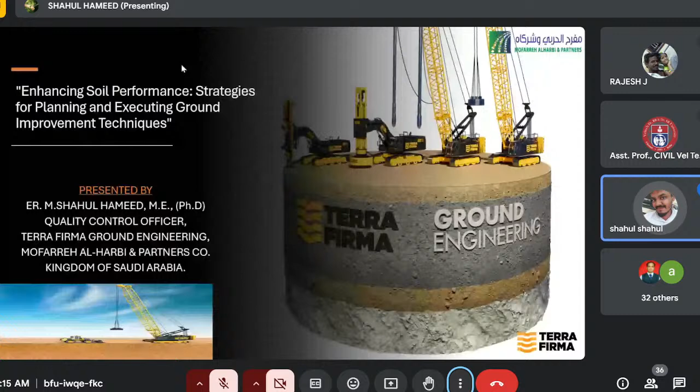Okay, so let me start my presentation. Before going to the planning and execution aspects, I will tell the basics of what we are doing, then I can go to exactly how to plan and execute the geotechnical work for ground improvement. First, what we are doing: we are doing ground improvement for the soil. So we should know what ground improvement is, and then what techniques we are using. Accordingly, it will be easy for you to understand what exactly we are doing.

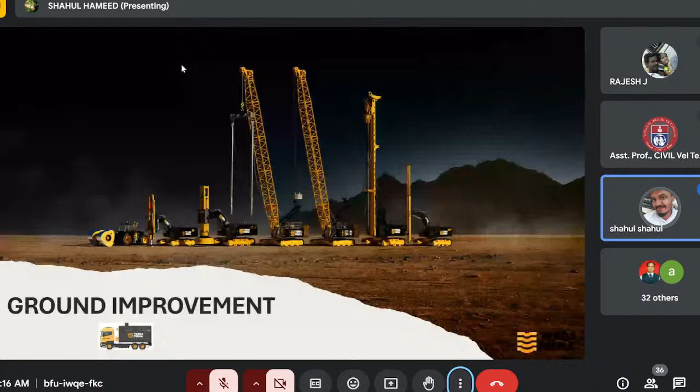So ground improvement is needed for three things. The main thing is bearing capacity of the soil. We need to increase the bearing capacity of the soil, reduce the settlement of the soil, and increase the stability. If we are going to construct any buildings, we need to increase the bearing capacity. So with ground improvement techniques, we try to increase the bearing capacity of the soil, reduce the settlement and increase the stability of the ground. That is the main concept of ground improvement. We have many techniques; I will share them one by one.

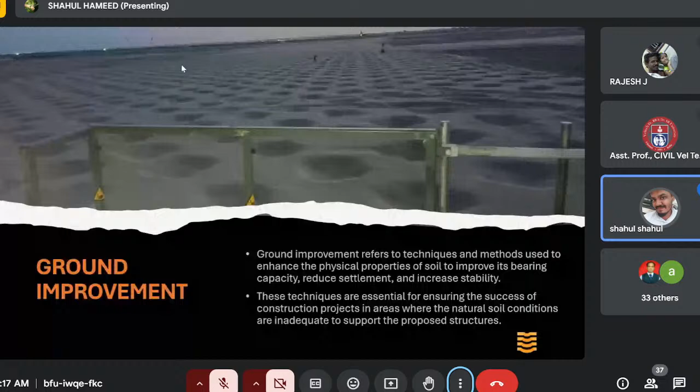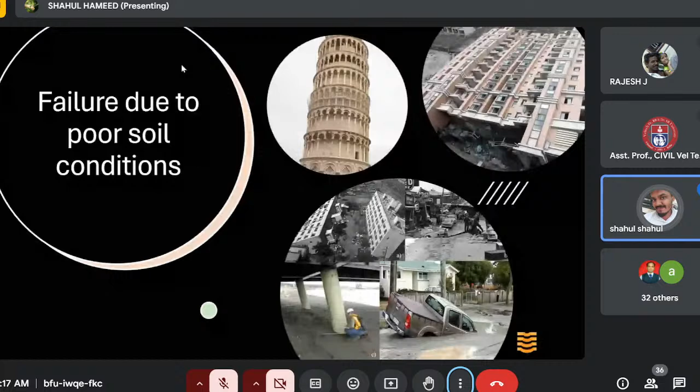So in this picture you can see failure due to poor soil condition. Many buildings failed due to not considering the soil criteria. So before constructing any structure, we should check the soil condition: what is the bearing capacity, what is the settlement. Based on that only we need to construct the building. These are the problems of soil: liquefaction, differential settlement, and excessive settlement. We need to concentrate on these before constructing a building or any other structure. So let me share what we are doing.

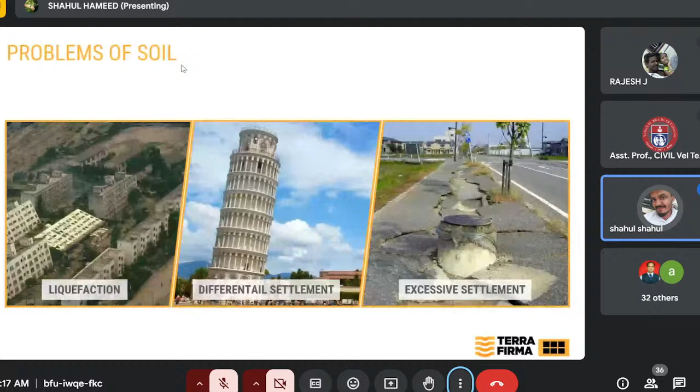Yes. So before doing any compaction work, we need to test the soil. For example, if you're going to the hospital, or if you're affected by some flu, what do you do? The doctor will check your blood sample. He'll collect your blood sample and he'll find out which kind of flu you are affected by. Based on that, they will give the treatment for you, right?

The same way, we'll go to the ground. We do some pre-testing. Based on the pre-testing, we'll do analysis of which kind of treatment we can provide for the soil based on the soil condition. Then we will provide the treatment. We'll adapt the treatment.

After the treatment, we test again. That test is called the post test. Based on the pre and post tests, we will ensure that the soil was strengthened. That testing is called CPT. CPT means cone penetration test.

This is the machine I'm showing. Crawler type is available and tire type is also available. Basically, the crawler type is easy to move in desert areas. We are in the Middle East, so the majority of the area is desert and near to the ocean as well. The soil was very silty and also very light, so the crawler type is best to move from one place to another to test the ground.

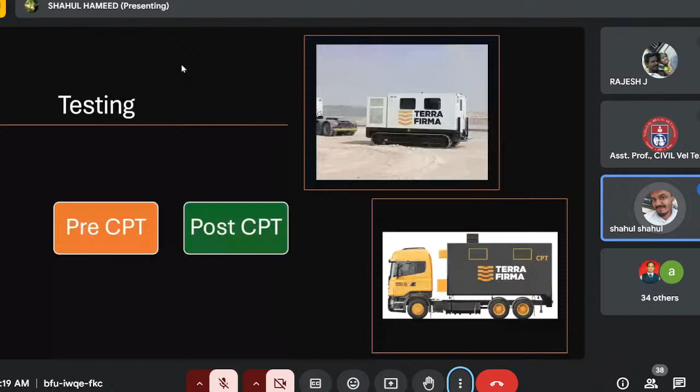You can see it in the next slide. This is the cone. The cone is actually a sensor; the cone contains the sensor. This cone is used to determine the subsurface condition of the soil. You see the machine here. Wait a minute, I'll take the pointer. Yes, you can see the machine.

In the machine, we have an opening at one end. From the opening, the rod will go down slowly. We have hydraulic pressure inside the machine, and the hydraulic pressure pushes the rod down. The rod will go down into the ground and collect the data of the soil. What data will it collect? It will collect the cone resistance, sleeve friction resistance, pore water pressure, and the friction ratio. This data we will collect from the soil.

Based on the data, the design team in our company makes the design based on the soil condition, whether it is weak or strong. Based on that, we decide which technique or treatment is good for the soil. The hydraulic push is at the rate of 20 millimeters per second. This is the rod. It enters into the ground and collects information about the soil. This is called the cone penetration test.

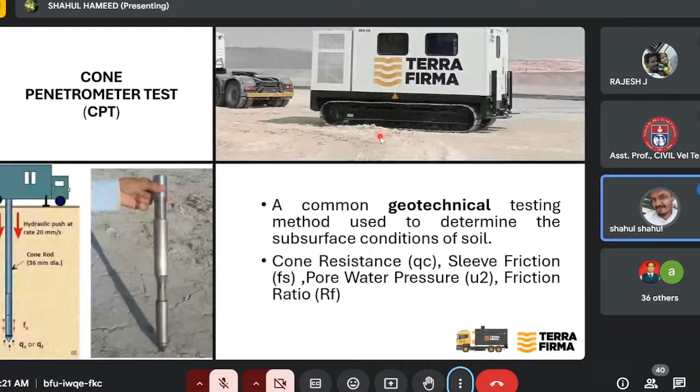So the client will provide the design criteria, up to which depth we need to go. They will mention in the design criteria like 6 meters we need to go, or 10 meters, or up to where the denser soil is. So we need to penetrate the cone up to the denser soil. So that is a condition.

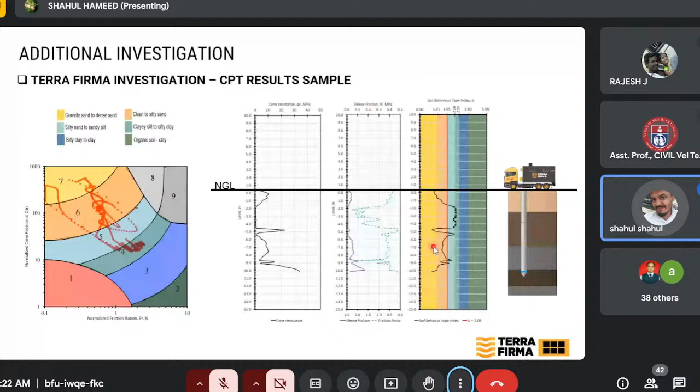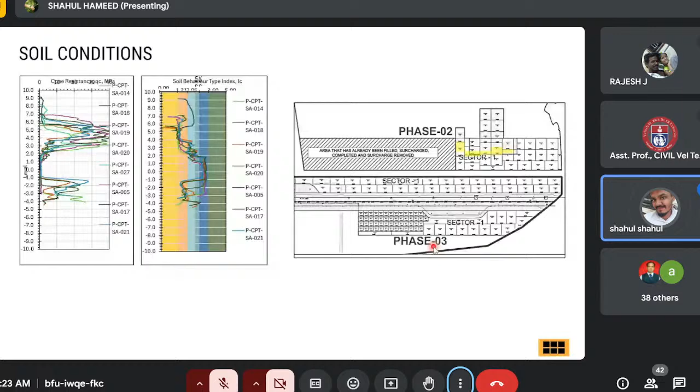And based on the CPT data, we checked what kind of soil, what kind of resistance, and what is the strength of the soil we are finding from these CPT results. Suppose the soil is very weak, then we need to adopt some treatment, which we call a technique. A technique like we have DC. DC means dynamic compaction.

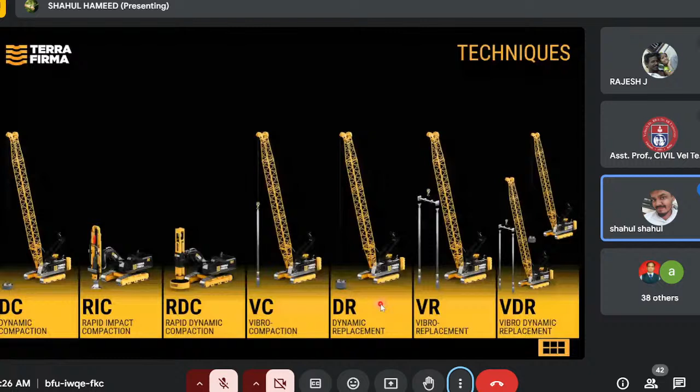Next, we have two categories: fine grained soil and coarse grained soil. Silt and clay are called fine grained soil, and sand and gravel are categorized as coarse grained. For coarse grained: sand, silty sand, gravel, and the dune sands come under the coarse grain category.

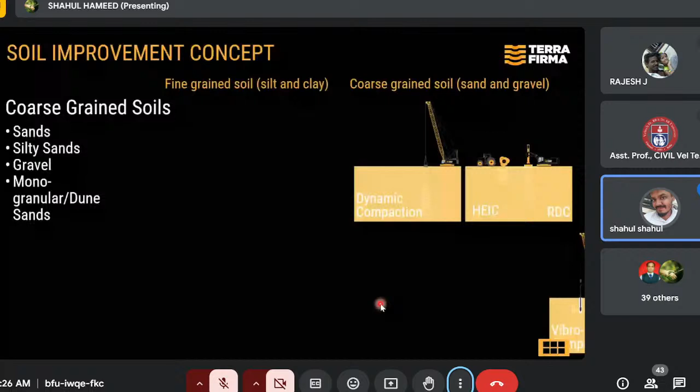For this, we adopt techniques like dynamic compaction, RDC, or vibro compaction for the coarse grain soil. And if it is a fine grain soil, we adopt techniques like dynamic replacement, vibro replacement, rigid inclusion, and prefabricated vertical drains.

We adopt these techniques for fine grain soil because it is full of silt, so we need advanced techniques like dynamic replacement or vibro replacement. So based on the soil criteria, we adopt these techniques. First, we'll test the soil to see which soil is present, and accordingly we'll choose our technique. Okay.

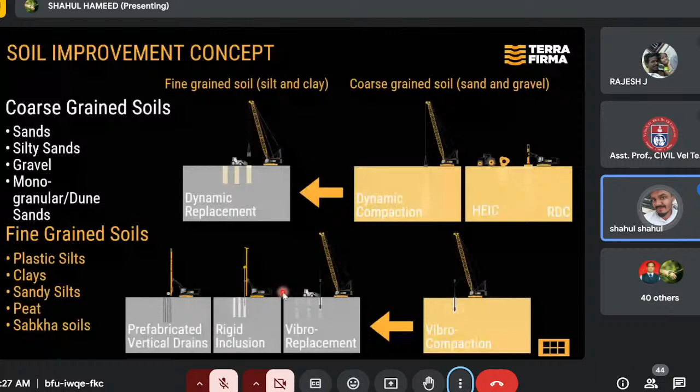Next is how we are selecting the technique. We have a simple method using legends L1, L2, L3. L1 is sand, IC means soil behavior index, so we calculate the soil behavior index. It is less than 2.05, or if it is greater than 2.05, and L3 is hard strata. From that we are classifying the technique.

For example, hard strata we can get from 1 to 4 meters. If you reach the hard strata from 1 to 4 meters, L3 coming up to 4 meters means we have sand, L1 is only sand. If it is like that, we will adapt only rapid dynamic compaction, the treatment up to 4 meter.

Suppose your depth is more than 8 meter, 4 to 8 meter, and your hard strata is found up to 8 meters, we are adapting the dynamic replacement. And for dynamic compaction, your depth of hard strata is more than 12 to 14 meter.

So we are adapting dynamic compaction, but we need to ensure there is no silt content present, which means L2. If the silt content is present, we should go for dynamic replacement. So we need to ensure there is no silt content but the depth of hard strata is more, we can go for dynamic compaction. But if depth is less and silt content is present, we should go with only the dynamic replacement.

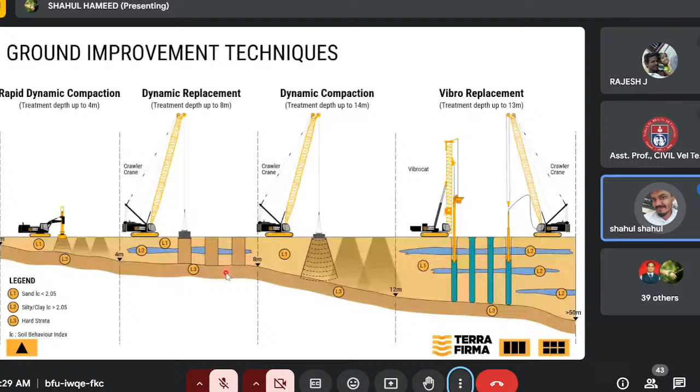And for the execution, before starting any work we will choose some trial area. In all companies, they never just accept to start like that, so before that we need to do some trial work. Once the trial is accepted by the client, they will allow us to do it.

So based on that we have the drawing, from the drawing we choose some area, and from that area we'll do some trial activity. From the trial activity we can find out how many blows are required because the dead weight is going to come down. So we need to find out how many times to tamp, from which height I can put the dead load.

So that calculation is based on the trial area, because every soil is different from one place to another. So if you're going to start any work at a new site, we'll do some trial work. Based on that, we'll calculate how many blows we need to give, how much energy we need to put, and from how much height we need to provide the dead load.

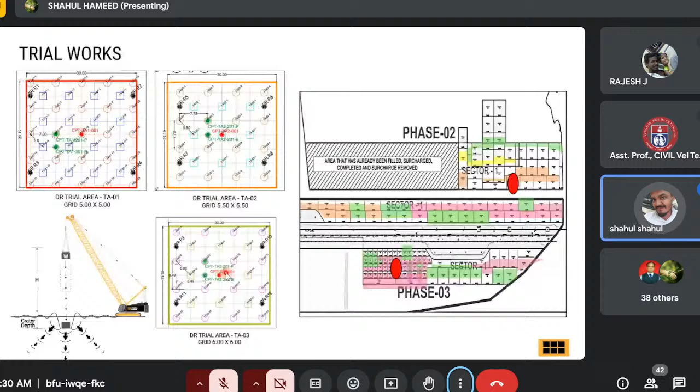For example, I can show the graph, like one side is penetration. So penetration you can calculate from the machine - the machine has a sensor and provides the data. So we have the machine from the client, we have the data, so we can find out the penetration depth from the machine. We'll give one blow, two blow, three blow, up to when the penetration is zero. When the penetration is zero, we'll find out this many blows are required for this ground.

We'll do some three trials, we never take only one trial. We'll do some three types of trial with different grids, so we can find out exactly how much blow is required for this ground, and how much height also we can tell them. This is one of the techniques.

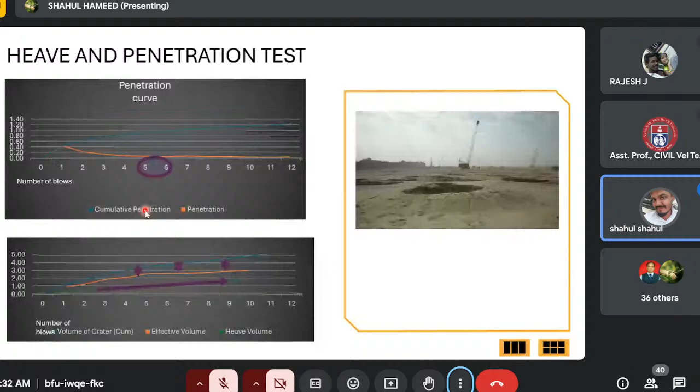And the next slide is like the grid. Just a minute.

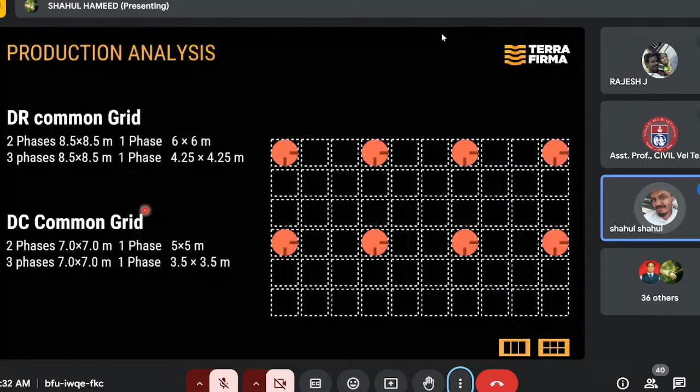The grid actually for the DR area, the grid size is different, and for the DC area, the grid size is different. The grid is nothing but the distance between one blow to another blow, that is one print to another print. So what is the distance between one print to another print?

Generally for DR phase two, we consider 8.5 meter into 8.5, or phase one, 6 into 6 meter. For the DC, for phase two, 7 cross 7 and 5 cross 5. So it is based on the trial test, we can select from the trial test. These things the technical team and the design team have, and the design team will suggest us the distance between one print to another print accordingly.

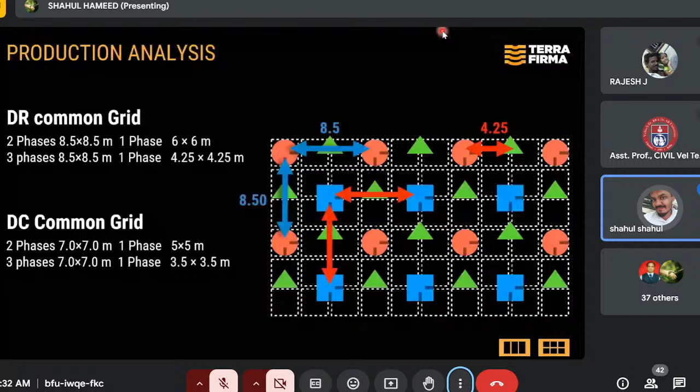And we can go for the dynamic compaction. So first, what is dynamic compaction? Which is nothing but we have the dead load. So if the ground is loose, the dead load falls down and makes it compact, improves the soil, and we can fill the soil. That's it, we can fill the soil.

You can see the animation running. So the ground initially was weak, so we will start tamping on it to reduce any air gap or any particular gap that is there. We can remove that gap with the help of the dead load. After compaction, we'll do refilling. This is called dynamic compaction.

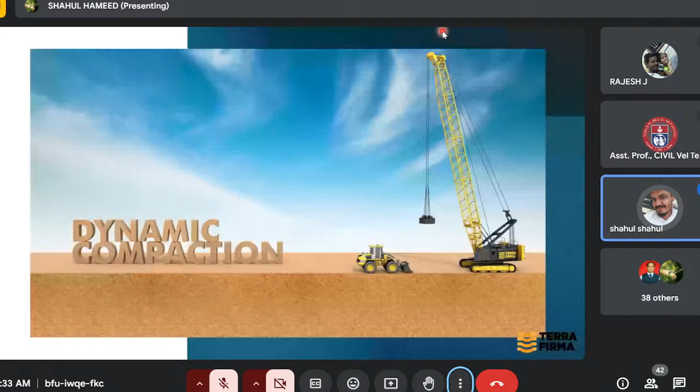You can see the circle-like structure. This circle is called a print. So we'll select the ground and choose the print, and how many prints are required for this ground - we have the calculation. Accordingly, we made the print and we can start the blowing on it and make the ground strengthen.

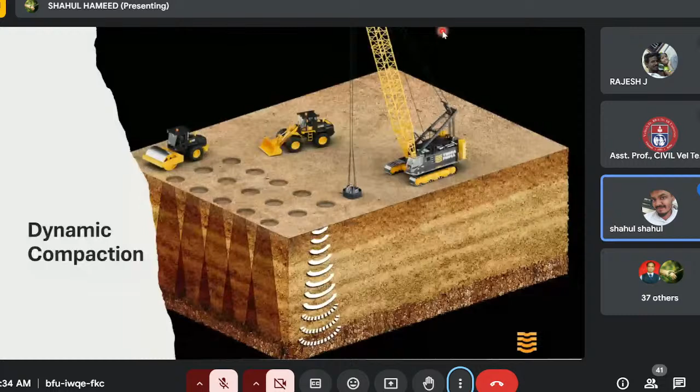Generally, dynamic compaction is a technique used for the loose soil. It's an effective and economical densification method to improve the ground. It's an economical method and generally used for the loose soil.

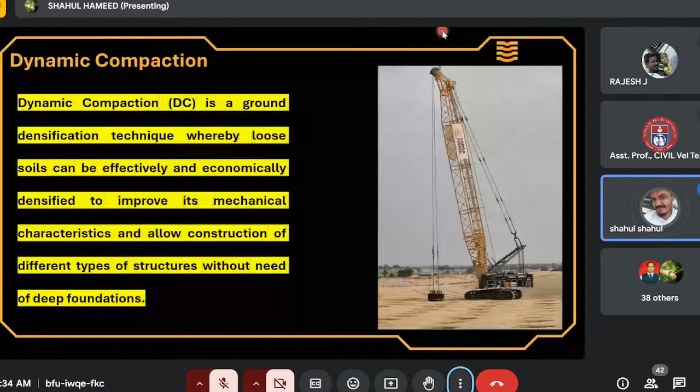You can see some of the pictures - we have done some compaction, so it will create some holes. So from these holes, we are filling the sand after that. The soil initially was loose; after the compaction it makes a hole.

Just a minute, you want to take something? Yeah.

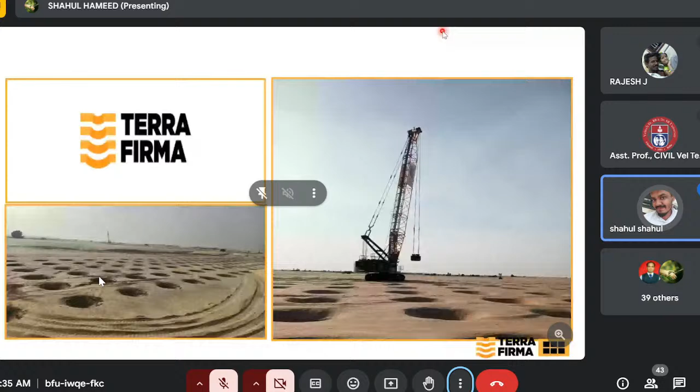So these are some of the images which I have done on ground improvement techniques. It will create a hole, so from this hole, that much gap is there - the soil was densified. Then it's again filled by the soil, and I'll make it level. This other picture is taken from the side, while doing the compaction process.

Yes, the depth of the height and the diameter of the weight, everything is calculated based on the trial test.

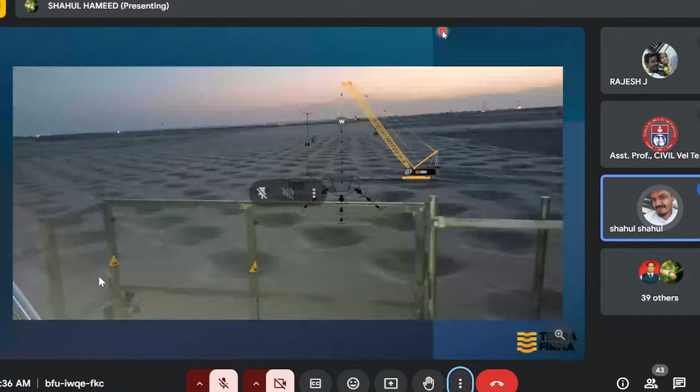The next technique is called dynamic replacement. Dynamic replacement is nothing but the ground will be compacted, then the hole will be formed, then the hole again is filled by the sand - filled by good condition sand.

You can see the picture. So the weak ground is compacted, it makes a hole. I will show it again, wait a minute.

Now we can see that the ground is weak. The dead load is coming down, so it will make a hole. Then we will fill the good sand - we'll give the good sand. Again it was compacted and made level. This was done for the entire ground.

This dynamic replacement is suited for where the soil contains silt particles. That kind of land, we are adapting the dynamic replacement to strengthen the soil.

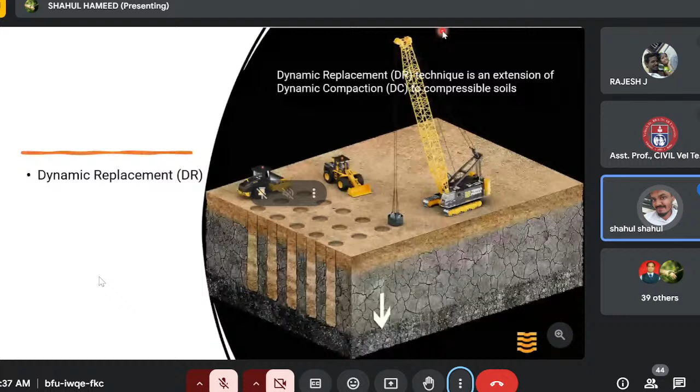So dynamic replacement is an extension of dynamic compaction. DC is normal - we are simply compacting, we are not filling anything. But in DR, we are replacing the sand, filling good sand, and compacting - it's an advanced technique. That's the only difference between DC and DR.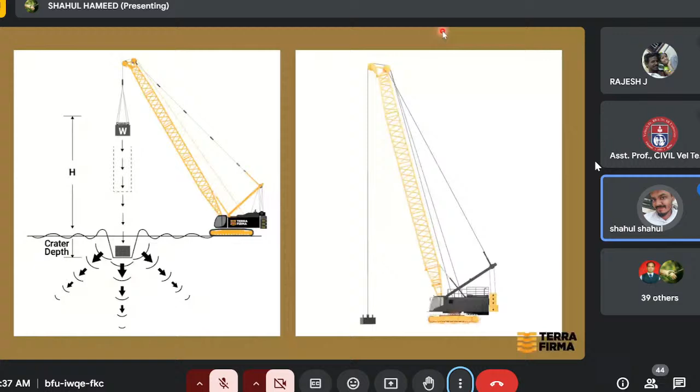Okay, now it's audible. Yes, now it's audible. This picture is like, yes.

Now this picture is like a pounder. So this is a pounder. You can see the weight, maybe changing from 10 ton to 33 tons. We have different types of pounders, so based on the ground condition, we adapt the pounder weight. So the pounder range is from 10 ton to 33 tons. This is the weight of the pounder.

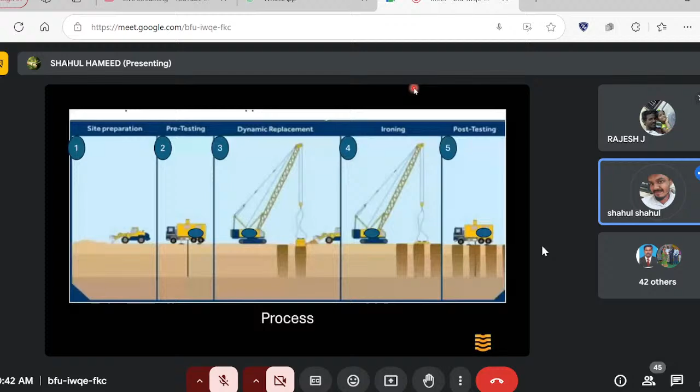Next, we'll go on the planning aspect of the ground improvement work. Initially, suppose you are working as a planning engineer in a geotechnical project, how to plan our work - that I'm going to share. I was working in Keller last year in Abu Dhabi, UAE, so from that we worked on some projects. I'm going to discuss that project, how I made the baseline program, and what planning aspects we need to do. This is the second part of the presentation - baseline program for project planning.

Before starting any work anywhere, we need to submit the baseline program. The baseline program is the Bible of the work. From the baseline program only, we can follow up how many days it's required - from day one to the last day, what work we are scheduling, who is coming for the work, how much manpower we are going to use, what equipment we are going to use. From the baseline program, the client may easily understand and accept it.

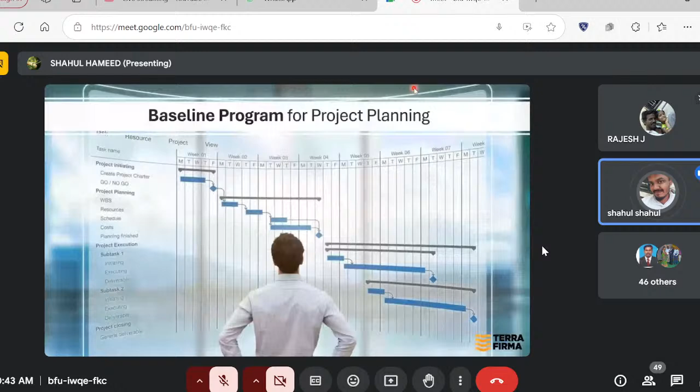So the first file is the baseline program. Before starting your work, the baseline program file must be approved by your client or consultant. For preparing the baseline program, what documents are required? The very first document required is the project contract document - this is important, because you should know the contract detail between you and your client, what is the scope of your work, what things we are going to do. Everything is based on the contract document, so first we need to read the contract document. In the contract document, legally the scope, deliverables, BOQ, and technical specification are mentioned - we should read the contract document first, and BOQ is a must.

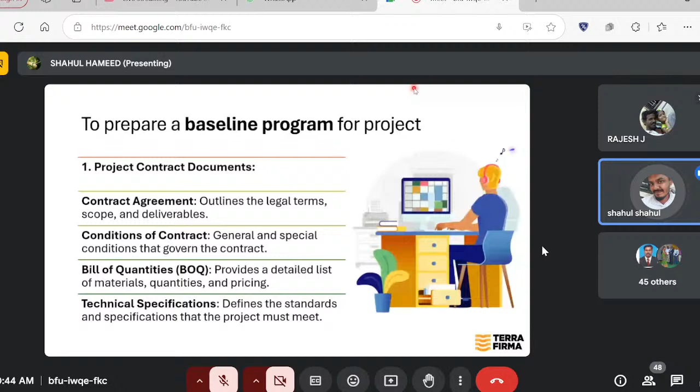We should read the BOQ - bill of quantity. For example, if we are going to do any excavation, I'll show in the next slide how much quantity, what's the quantity per meter, and what is the amount for this particular work. This is explained in the BOQ. From the BOQ, you can understand the quantity as well as the cost, and accordingly plan your work. So reading your BOQ is a must for planning work.

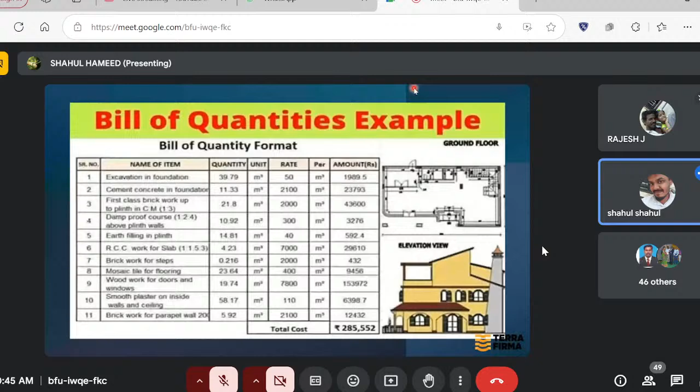We should read the contract document first, read your bill of quantity, and read the drawings and design documents, because we have different types of drawings available in the field - architectural drawing, structural drawing, MEP drawing, some shop drawings, and approved design drawings. Generally, based on our work, whichever drawing is needed, we need to read that drawing first. From the drawing, you can identify how much area we are going to work on, and find out any obstruction or the distance between one area to another.

So you can come to a conclusion based on the drawing. Reading a drawing is important for the planning of your geotechnical work. Not only geotechnical, all work. You can consider it a basic thing for all work. So first you need to read the technical, I mean contractual document. The next one is the BOQ we need to read, and the third thing is reading your drawings and design documents.

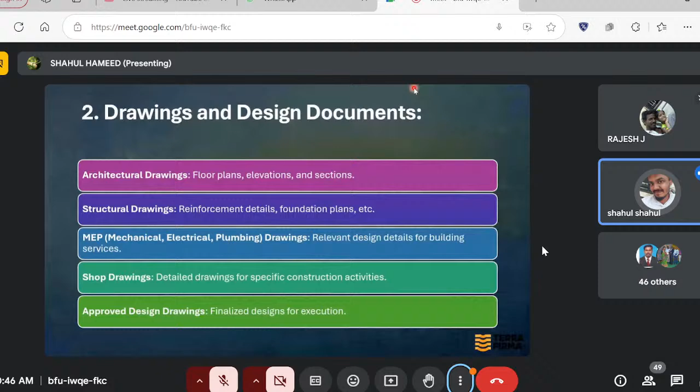Okay. So next one, project scope document. What is your project scope exactly? What scope you have? What is the contract between you and your client? We need to review the project scope, and also we need to do the WBS, work breakdown structure. Based on that we need to plan our activity, like how to create a WBS. That is important. What's the first work, what is the second work, and any other sub branches. We need to split the work, because if you split the work, you can organize your planning work. So making your work breakdown structure is a kind of skill that we need to develop.

And we need to know about the milestones and deliverables. A milestone is nothing but when the client is asking to complete one area to another area. What are the important dates to hand over? Those things come under the milestone. And we need to find out the critical activity and critical path. If we have any work, we should find out the critical activity, because we cannot change anything in the critical activity. We know that a critical activity is one where your float value is zero. Float zero means we don't have any days to delay. If you delay your critical activity, your project duration will be extended.

So if the activity falls on the critical path, we should focus on this activity first. Then for the remaining ones we have some float value, 1, 2 or 3 days. We need to adjust the work and do it. But we should focus on your critical activities first, because we cannot lose any single day on your critical activity. We need to complete on time.

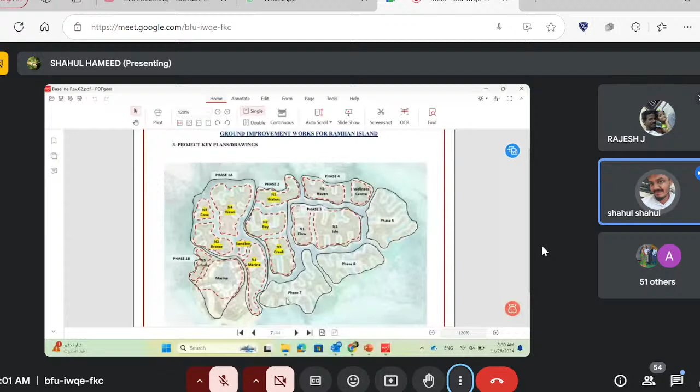So we need to highlight that area, and we need to tell them the available area of each island. There are little small islands, and the collection of islands is called Ramhan Island. Each island holds an area, and based on the area only, we can find out when we can finish the work. So we need to mention the area with the help of your survey team. They will go and mark your points, find out the area of each one, and give it to you.

And we need to mention the crew movement. Crew movement is nothing but where I'm going to start and where I'm going to end. We need to make a diagram and tell them I'm going to start this area first, then follow with this, and after completing I'm going to this island, that island. We need to represent it with a drawing so the client understands easily. If you make it like this, the client will easily understand your work plan. Okay.

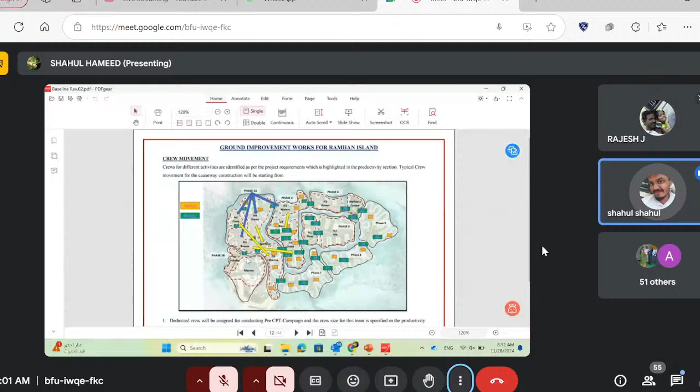Next, other documents, like how we are making the bar chart, and what document registers we are going to maintain. That purely depends on the planning part. You will understand when you're working on the planning side. The next important thing is the work breakdown structure.

So we need to make our work breakdown structure. We have a lot of work, so the work will be distributed. What is first, second and third? It's followed by which work? It's continued by which work? That is called the work breakdown structure. So we need to make the work breakdown structure first.

The next one is we need to give the IDs for each activity. For example, for your procurement activity, we should give some ID, and for shop drawing, we should give some ID. For the material and method statement, we should follow some ID. So we should go like this. We should make some activity IDs first. Okay.

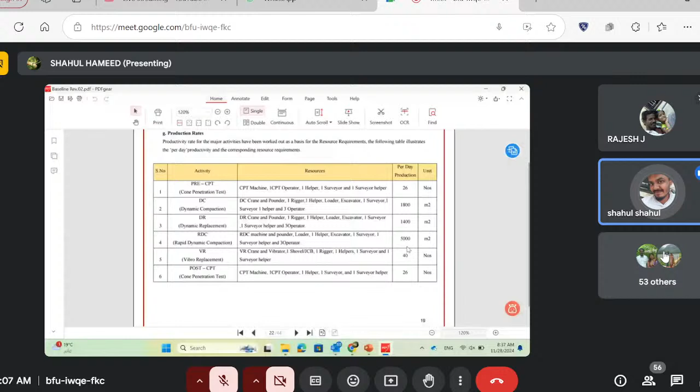So this information is required for the ground improvement work and also geotechnical work. Per machine efficiency, how much area it will complete, that we should know. Only based on that can we conclude the duration of the project. And some notes: the working criteria and conditions we need to tell them.

The next one is the critical path. So we need to find out the critical path. We need to make a program in P6, Primavera. So we should find out what the critical activities are, and we need to submit to the client. And this is a detailed planning program created in Primavera.

And the next one is the manpower histogram. With the manpower histogram, we need to create an S curve. The S curve is important for the planning. So we should show them, from the first week, how much equipment I'm going to use, next week how much equipment, and it will go on up to the end of the project. How many machines are coming this week, how many machines I'm going to use.

You should plan your work to submit to your client, because we should have the plan of when we are going to start the work and how much equipment is required for this week, and we need to tell your team. So I need this equipment for this day, I need to start this work. That aspect we need to follow up. It's easy to follow up on them.

And this is for the equipment histogram. Previously, it was the manpower histogram. This is the equipment histogram, purely for the machines: RDC crane, CPT machine, JCB, whatever equipment is coming. So we need to make the weekly planned equipment histogram before starting the project. So we should follow this document.

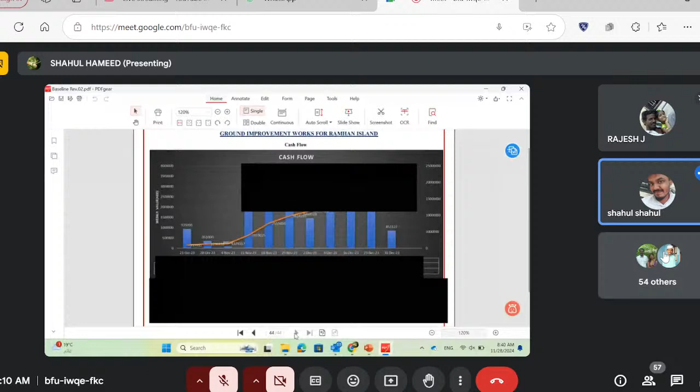So S curve for your equipment, S curve for your manpower, S curve for your activity. Three kinds of S curve, and the last one is the cost S curve also. You need to make your cost S curve. Okay, per week how much cost we need to collect. I have shared this drawing because I don't want to share my cash flow here. So this is the way.

This is the kind of document we need to submit to our client before starting the project. This is called the baseline program. The baseline program is the entire detail about your work. The baseline document should be approved, then after that you can start your work. I'm telling about the execution part now. Once your document is approved, we can do pre-CPT and post-CPT, and start our work.

So every day we need to submit the daily report. The daily report is nothing but, for one zone, how much area we completed the last day, which activity is done, either pre-CPT or post-CPT. I can show my daily report here. Now I'm working on the Fahdili gas plant in Saudi Arabia, on the Fahdili gas plant expansion work. So ground improvement work we are doing.

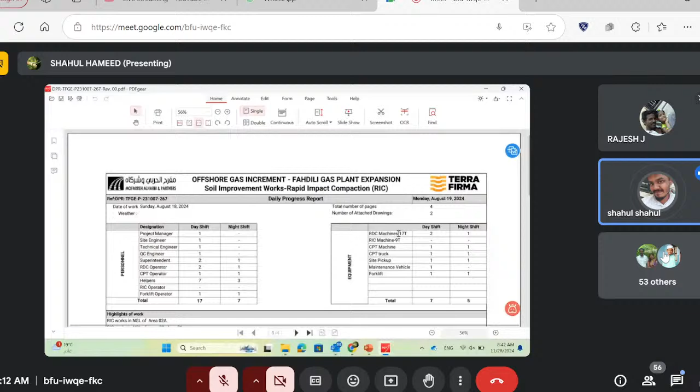So we need to tell them which engineers and which manpower are working, and what equipment I'm going to use. I need to highlight the last day's work. Last day I was using RIC work, CPT work, and forecasting what I'm going to use in the future. This is the area for each zone. This area was completed, this much remaining, this much percentage completed.

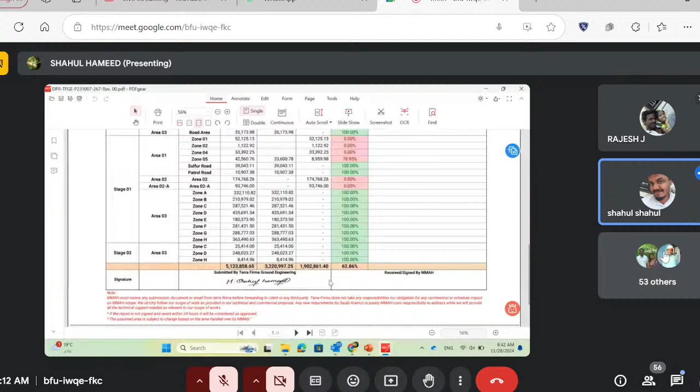We need to tell the client about the CPT also, how much CPT is done, how much remaining, and standby details also. If your equipment is on standby without any reason, without a permit, or your HSE officer stopped it, we need to indicate the timing also, the standby hours.

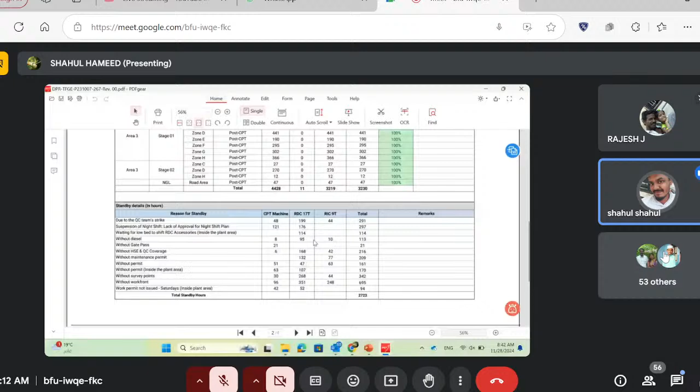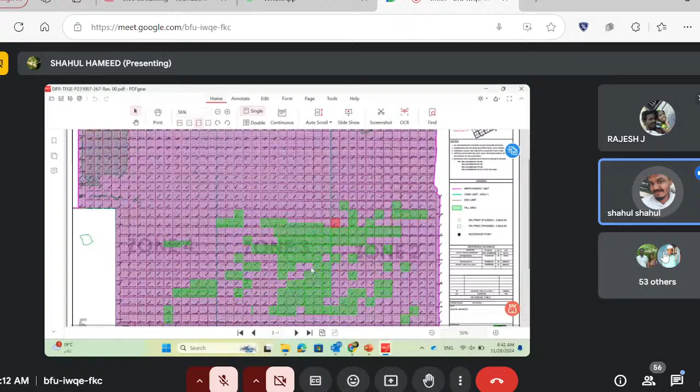The next thing is we need to give the drawings. In the drawing, green color means completed earlier, red color means done last day. Every day we need to provide the drawing to the clients so they can easily track our project, where we are working and how much area is completed. And this is also some other area.

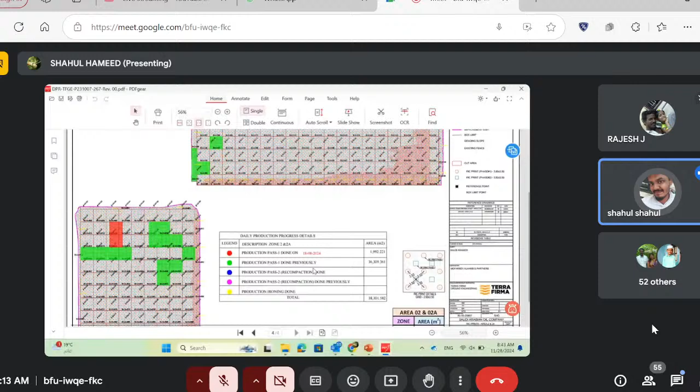Green color area means work is already done. Red color means we worked on it last day. The remaining uncolored one is where we need to do compaction. From the drawing, the client will easily understand your workflow. So this is called the daily report. Every day, if you're working in a construction project, you need to submit your daily report to your clients. This is the first part of execution.

The next one is the weekly report. I will show you how we present our weekly report to the client. This is the ground improvement work we have done for Ramhan Island. From the weekly report, we make an agenda: what content I'm going to explain in the weekly report.

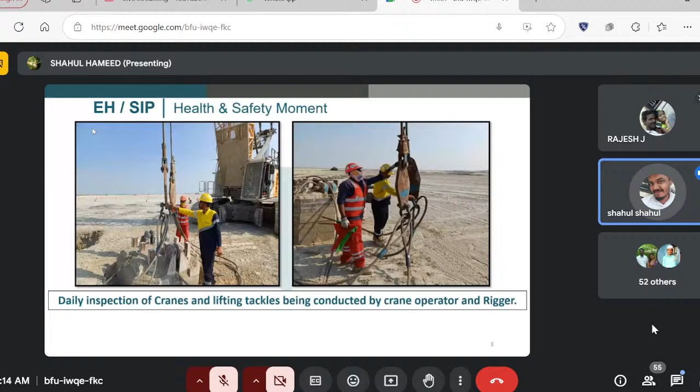The first thing is we need to tell the safety activities: what safety activities I implemented last week. That is the first slide. The next slide is statistics: how many workers, man hours worked, whether any safety accidents or environmental issues occurred or not. Based on that, I need to report them.

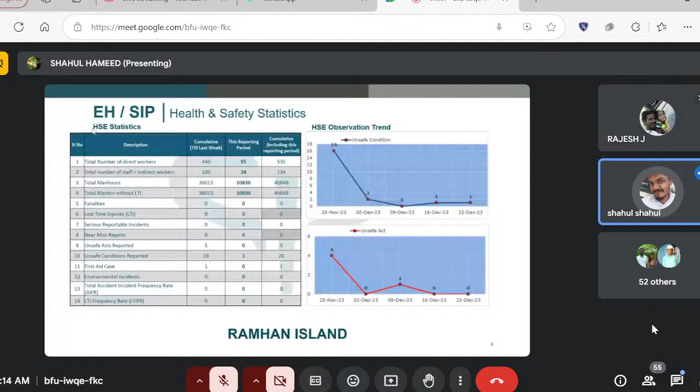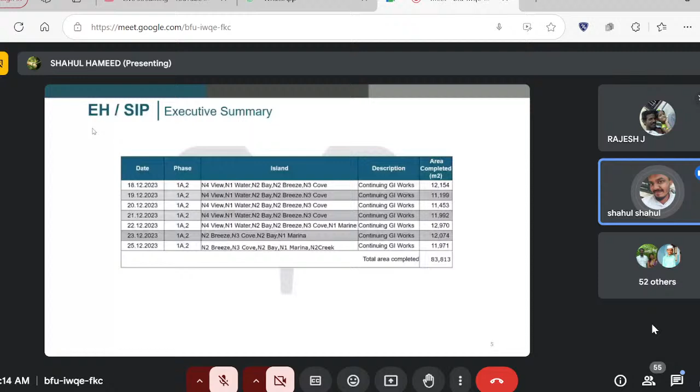This report, they are asking first safety and the statistics. Okay, how many direct employees work, how many indirect employees work. That's the detail we need to submit. And the next one is, for the last week, how much area is completed for each day, and at the end we can calculate the total area. This much total area was completed in the last week. We can tell them easily. They will reply to us. In the meeting we need to present.

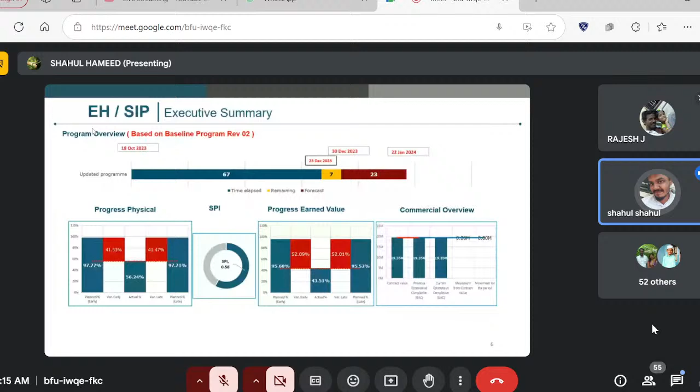You can see that from the Primavera, so we can find out the starting date, ending date, and your forecasting date. Actually, this project was delayed 23 days. Okay, so you can calculate with the help of your Primavera software. So from the Primavera, I'll make this graph. Then this is also from the Primavera, like how much percentage we did before last week, this week, what's the forecast; that calculation is also made.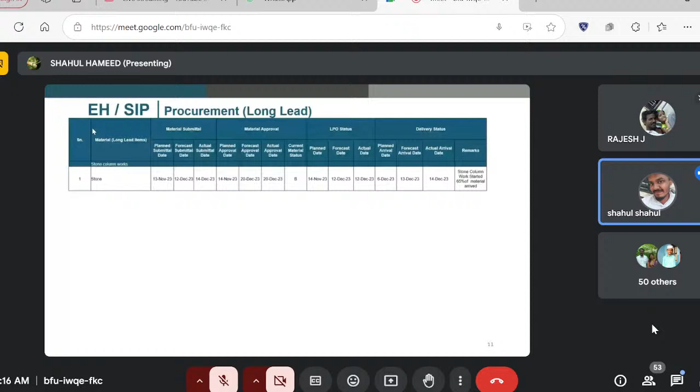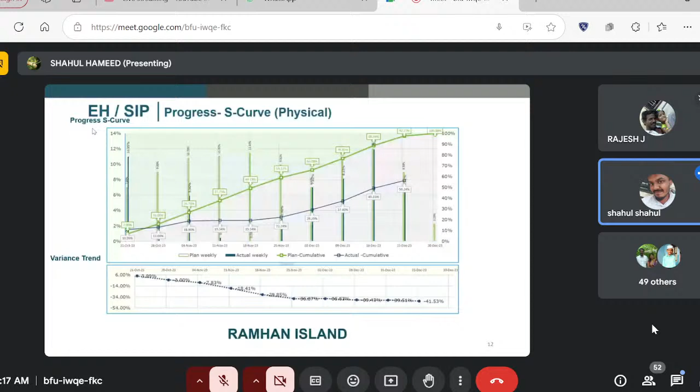And this is an S curve for the work progress. So how much we planned, how much we achieved for the last week. Each and every week, how much we planned, how much we achieved, we need to show to the clients. From the graph, they will easily identify whether we are delayed or ahead. And this is for each zone, how much percentage is done and remaining. I'll show the important one.

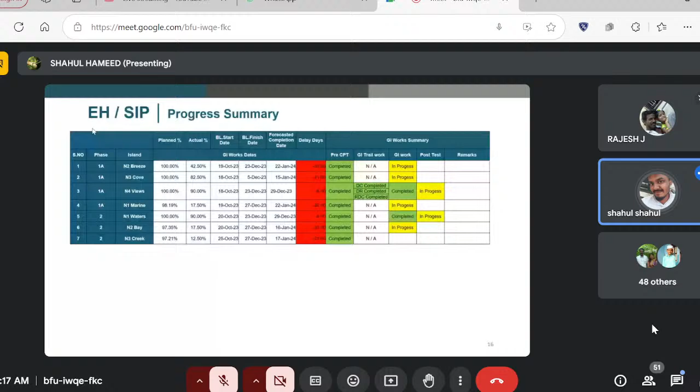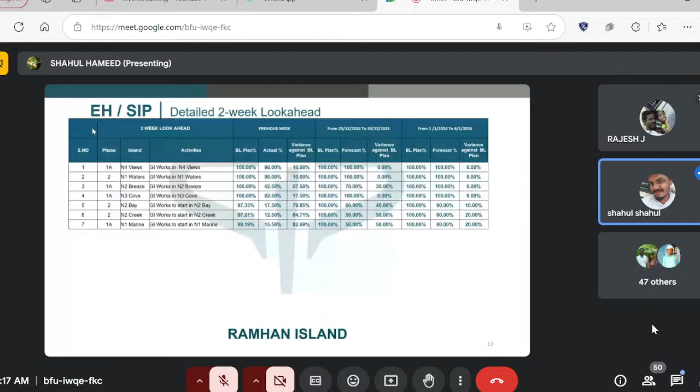And the next topic is the equipment histogram. For the equipment, how much you planned and how much is actually present. Okay, many times it is not equal. It comes in a different way because site conditions are always changing. Planning always differs from the execution.

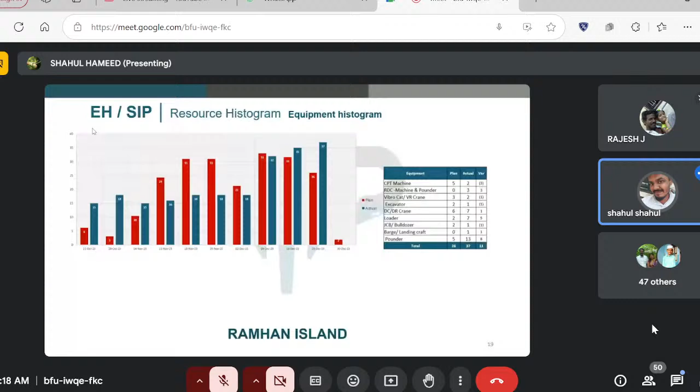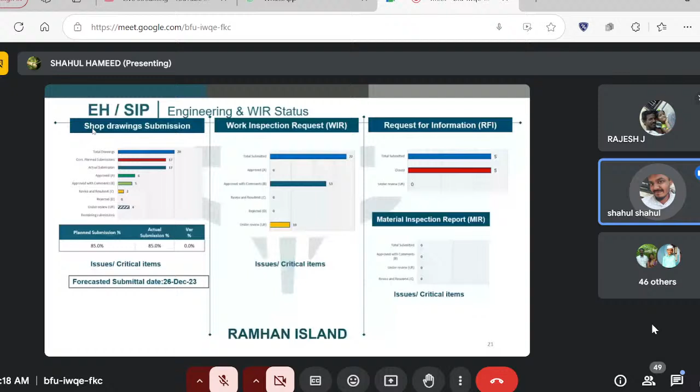And the next slide is very important. This is documentation. So how many method statements you submitted, whether they are approved or not. Okay, whether it falls under code A, code B, or code C. And how many shop drawings you planned and submitted, whether approved or not, code A, code B, or under review. So these kinds of details we need to show to the client. Accordingly, they will plan.

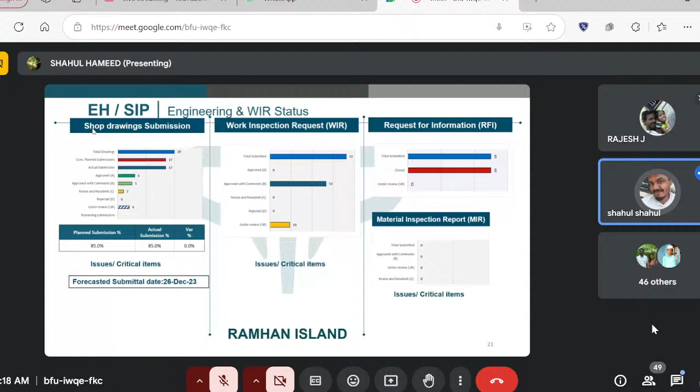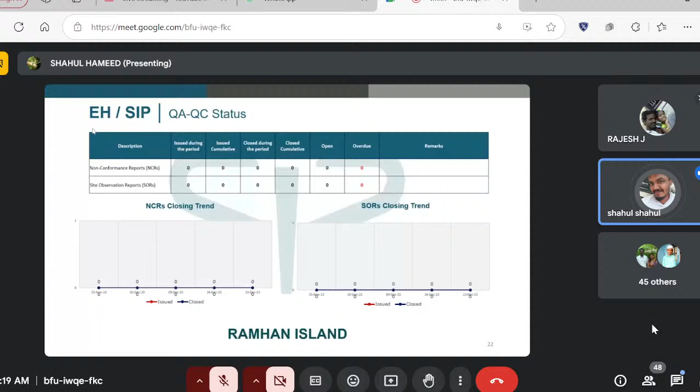So this is pending, they will sanction you and allow you to do it. If in your site having any NCR or SOR, they will claim a site observation report or non-conformance report if anything is there. It's related to QA/QC as well as the safety department. Anything related to approval, authority, or NOC things, we need to display to them. This approval we need, or this NOC report is pending, we need to show them. And commercial and payment, we should show them the payment for the last week, whether we received it or not, and we need to mention it to them.

I deleted the slide, only the content I placed. And we need to tell them the site activity. So site images, last week what we have done, the picture they will ask. The site picture we need to show them.

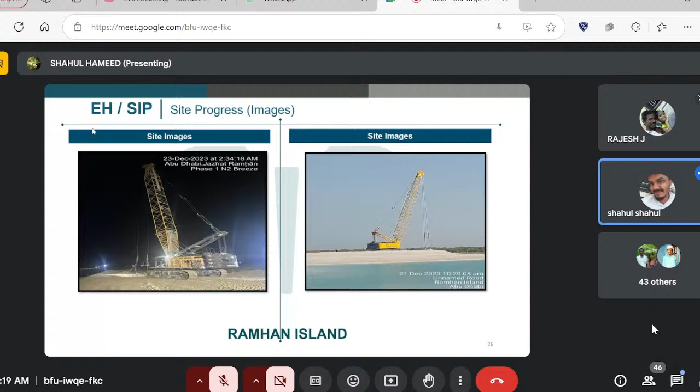Okay, the site we, this one. So based on, as a planner's work, we need to do the daily report, weekly report, and final assessment report. We need to plan these three reports, and we need to submit them to the clients.

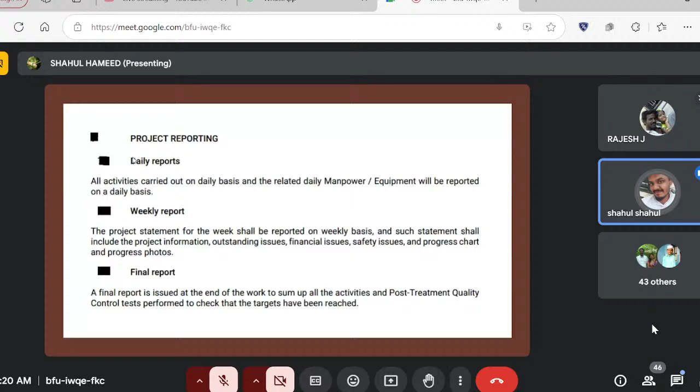Okay, I think we are from Terra Firma. We are doing on-ground improvement work. In the Middle East, we have a company. We have a branch in UAE as well as Saudi Arabia. So yeah, we are doing on-ground improvement work.

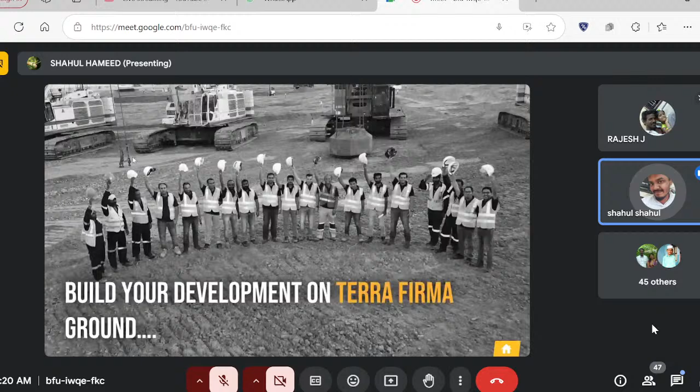Okay, then thank you for the opportunity. I think I completed my task, what madam assigned to me. I'm happy to share my work experience with you all. I explained what we are now doing, what techniques we are following, and what is the planning aspect and execution aspect about the ground improvement technique. So if you have any doubt or any clarification, any discussion you need, you can ask.